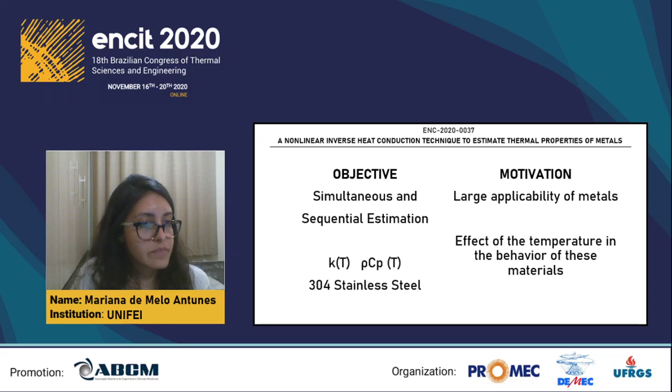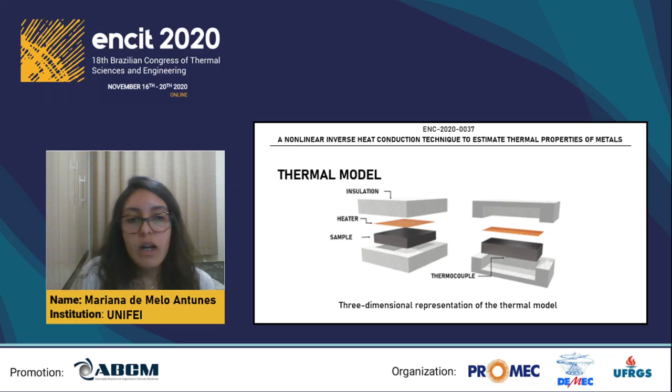So for that, we have simulated this thermal model, which consists in a squared sample of 304 stainless steel with a resistive heater on the top surface and a thermocouple placed in the bottom. The model is one-dimensional and non-linear because the properties vary with temperature. And it can be solved by the finite difference method with the boundary conditions of constant heat flux in one surface and insulation in the other.

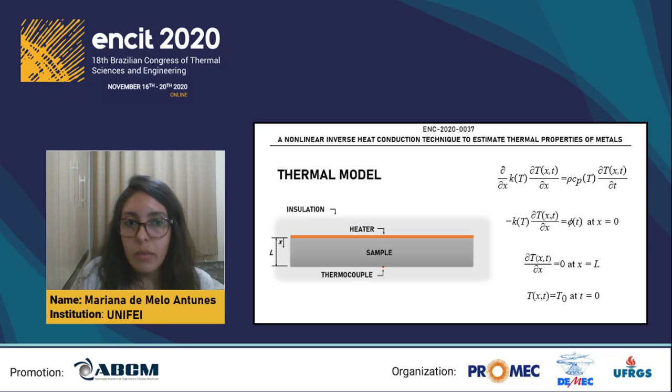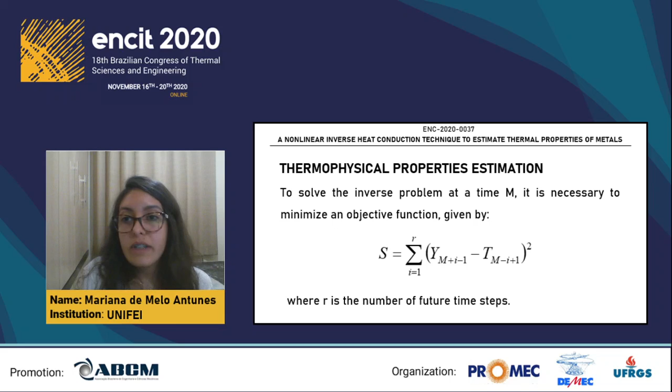And in order to reproduce a real experiment, we have added some uncertainty to the numerical solution, close to the uncertainty of a thermocouple. And then, to estimate the properties, we define an objective function, which is given by the square difference of the experimental temperatures that we have simulated and the numerical temperatures that we have calculated through the finite difference method. And in order to regularize our results, this function is defined within a small domain of future times, in which the thermal properties are considered to be constants.

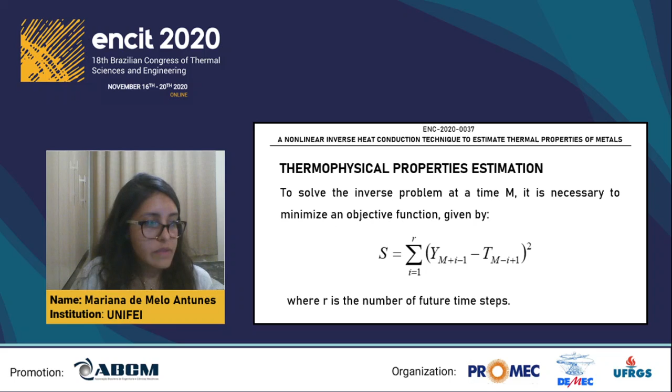And this function can also be written as a product of the difference of the vectors, where the numerical temperature is a function of a vector composed by the thermal properties of the materials. And our thermal properties can be separated in two terms. The first one represents our initial guess for the property, and the second one is the increment that, added to this initial guess, will provide us the optimal thermal property for that time step.

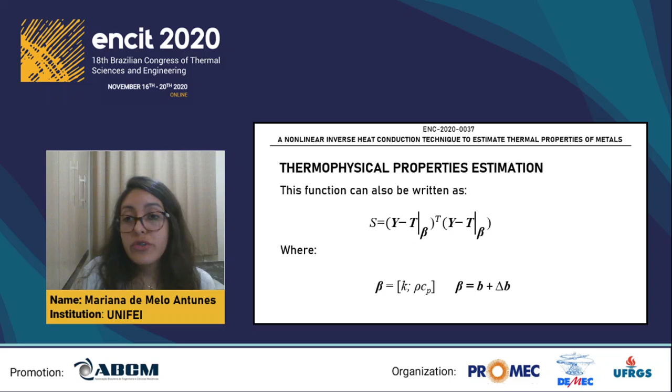So in order to obtain this increment, we need to rewrite our numerical temperature into a Taylor series expansion and replace the gradient coefficients by its matrix form, which we call the sensitivity matrix.

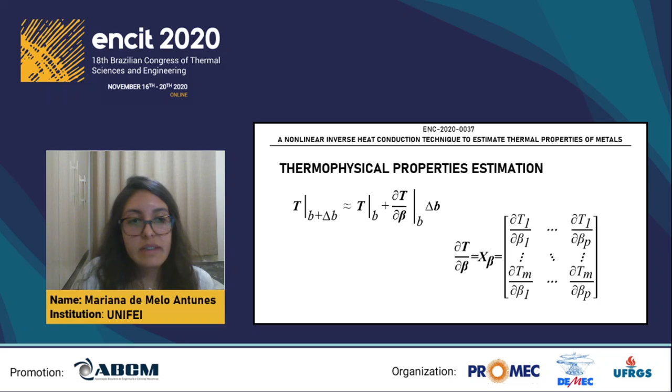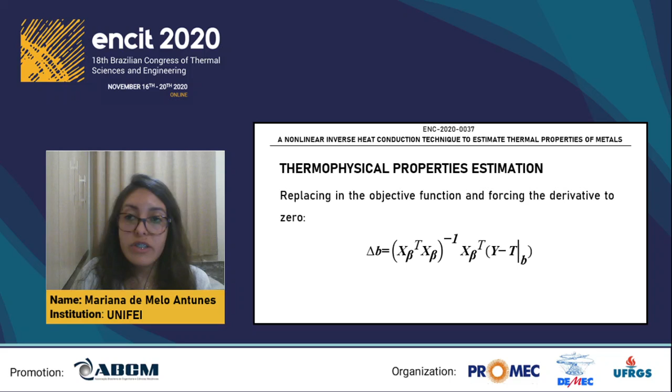And then, if we reapply these values in the original objective function and force its derivative to zero, we can obtain the increment that, added to our initial guess, will provide the properties that minimize the function in that time step. So for each time step, we need to define a convergence criterion and an initial value for the properties.

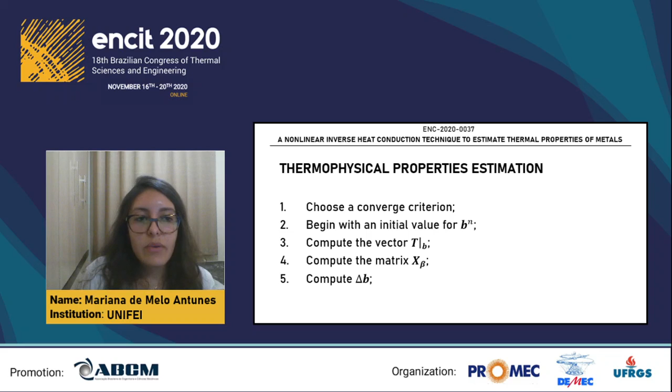And then we calculate the temperature and the sensitivity matrix with that property. And with those values, we can obtain our increment. If we achieve our convergence criterion, we can go to another time step. And if not, we add the increment to the initial value and repeat this process.

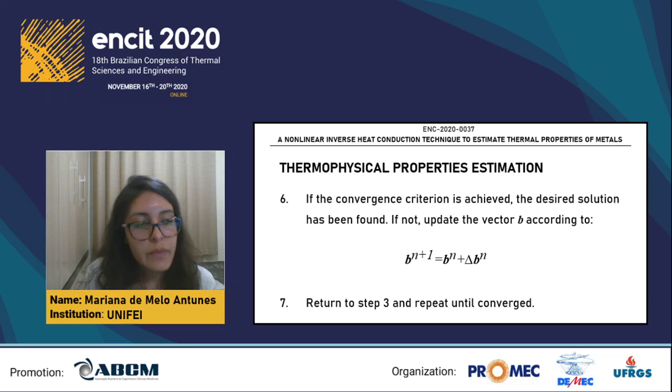But even before applying the method, there are some details that we need to think about and some analysis that we need to do. And the most important one is the sensitivity analysis, represented by the sensitivity coefficients. They are defined as the first derivative of the temperature in relation to the parameter. And in order to be better compared, they are normalized by multiplying the results by the parameter.

And through these coefficients, we can define the heat flux intensity, the position of the thermocouples, the duration of the experiment, and many other details about the estimation. And what we're looking for is an arrangement that makes these coefficients as great as possible, since the greater their magnitude, the better the estimation.

And here we have the results for the experiment that we have simulated. The red curve represents the coefficients for the thermal conductivity, and the blue one for the volumetric heat capacity. And the last curve represents the temperature variation. As we can see, the coefficients for the volumetric heat capacity are proportional to the temperature variation, and the ones for thermal conductivity are proportional to the heat flux intensity.

And for this arrangement we have great sensitivity for both parameters. And even though the magnitude for the heat capacity is greater, the sensitivities don't present dependence on each other. So the estimation can be performed without any major problems.

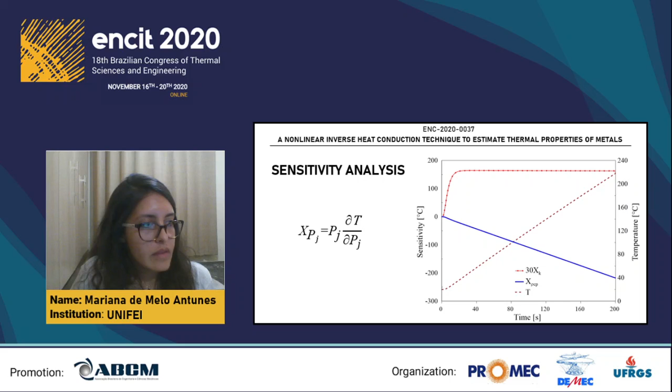And here, in first place, we have the results for thermal conductivity. As we can see, the estimated points have a linear tendency, so they can be fitted by a straight line. And the determination coefficient of the linear fit is 0.998, which is really good.

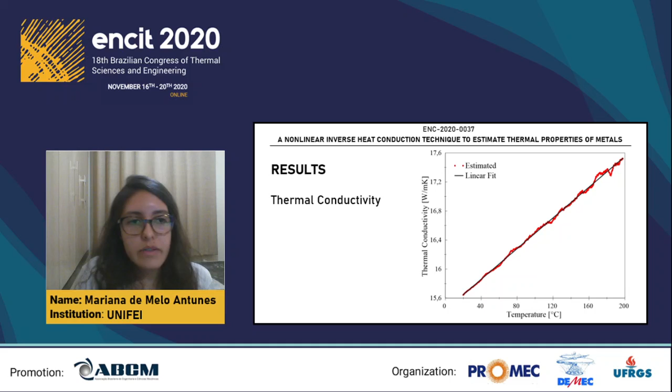And here we have the results for the volumetric heat capacity. As you can see, the estimated points for volumetric heat capacity have a smaller deviation from the fitted curve, and the determination coefficient is equal to 1. This behavior can be explained by the sensitivity coefficients. Since they are greater for the volumetric heat capacity, its estimation is less affected by the uncertainty of the experimental data. And for that, they present less residuals.

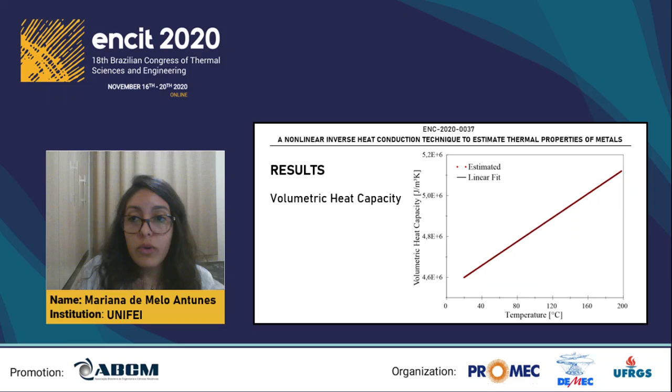And besides that, as we're talking about a simulated experiment, we expect that the properties that we obtain through the method are comparable to the ones used in the simulation. And that's what we show here in this table. We compare the coefficients of the curves that we have obtained through the method with the coefficients of the curves from our references that we used in the simulation. As we can see, even for thermal conductivity, which has a higher deviation, the largest difference observed is less than 1%, which confirms the accuracy of the method.

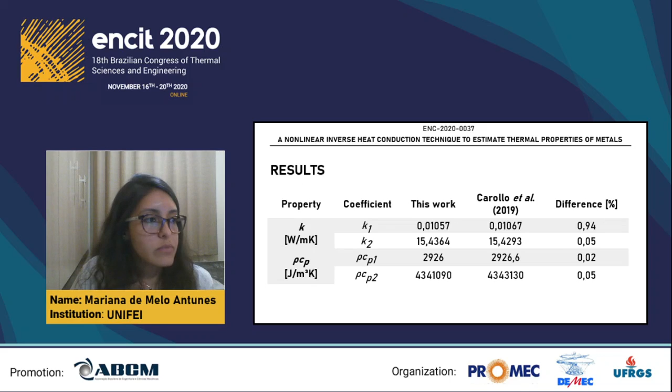And besides that, the model that we have simulated is very simple and affordable. So for future work, our main objective is to apply real experimental data in the method. And that's what we've been doing in the last few months. Here we have the curve for the thermal conductivity in a real 304 stainless steel sample. The experiments performed were exactly like the model described in this work.

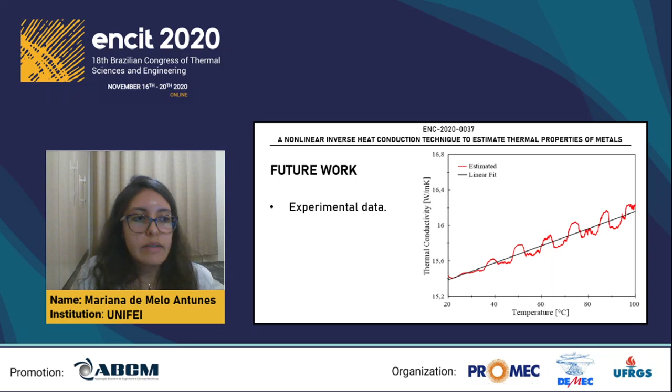And we're also working with cemented carbide and other common steels. Of course, these are some preliminary results that we hope to keep improving, but they confirm the reliability of the method. And besides that, we hope to apply the method for different boundary conditions and even for a three-dimensional model. And so that was our work.